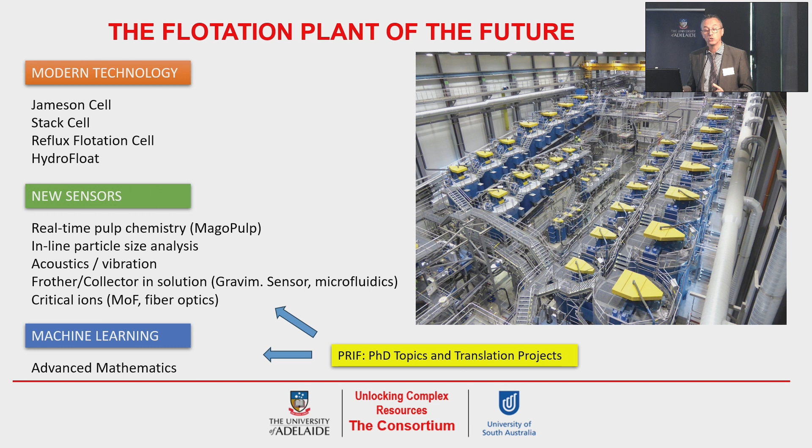A lot of things that are now just under development will be standard in the flotation plant of the future. And not to mention machine learning, which we all know will play a major role, because we would like to achieve a plant which can learn from previous operation and adjust in real time as the feed characteristics change. This would be the big advantage and a big goal.

This year I'm not going to talk about the different technologies as I did last year. I'm focused more on the application of these new flotation technologies and how I see - and we see - development and application of these technologies in the real world. I have to mention that we recently started at UNISA with my colleague Bill Skinner a specific project called the Advanced Flotation Project, which has a very applied component, and we have a number of industry partners listed there.

The key point I want to say about this project, because the discussion went on earlier this morning about involvement of PhD students with industry and their research - in this project, the PhD topics have been discussed and defined closely with the industry sponsors. Our industry sponsors are approached not at the corporate level, but at operational level. So we have individual champions within the different companies - two of them are here, Grant Small and Chris Creed from Magotteaux - but we also have other champions for each of the other sponsor companies. Sitting in front of them, we discuss what would you like to happen in the project for you, what would you like to see in your plant, on your ore?

Can we discuss a PhD topic which is of interest to you?

The PhD students we have in the project are working on a specific project for a specific company on their ore, and they're supervised jointly by relevant people in the company. This is the way we think may provide a good outcome for both the university and the industry partners. This project started this year and will last three more years, so we've basically just started.

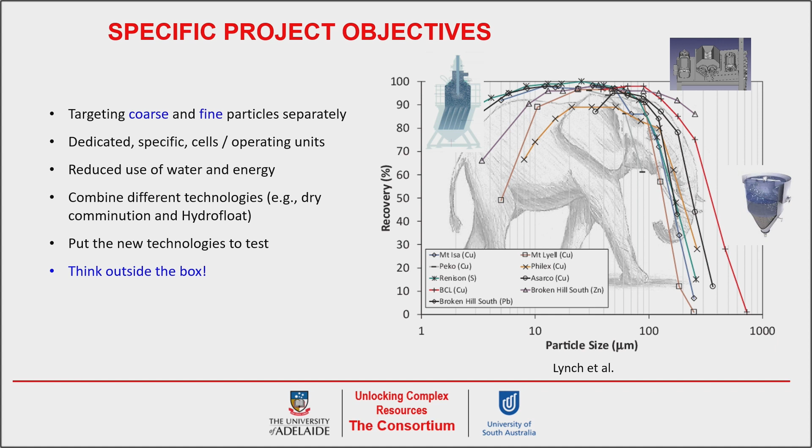But don't misunderstand me, because in the last, let's say, 10 years there have been many new flotation devices developed and offered to the market, so there's a lot of new machines around. I have to say I'm a big fan of mechanical flotation cells, because they're reliable, easy to operate, relatively inexpensive, and arranged in banks. So if anything goes wrong in one cell, you can still hope the following cell will recover that material. In principle, they're a robust technology.

But if we really want a step forward in specific applications—not everywhere, but where we want to target very coarse particles to save energy for grinding, or we have an issue with fine particles because of slow flotation rate—then we need to look at modern and different technologies. This is what we would like to test in the project on specific company ores.

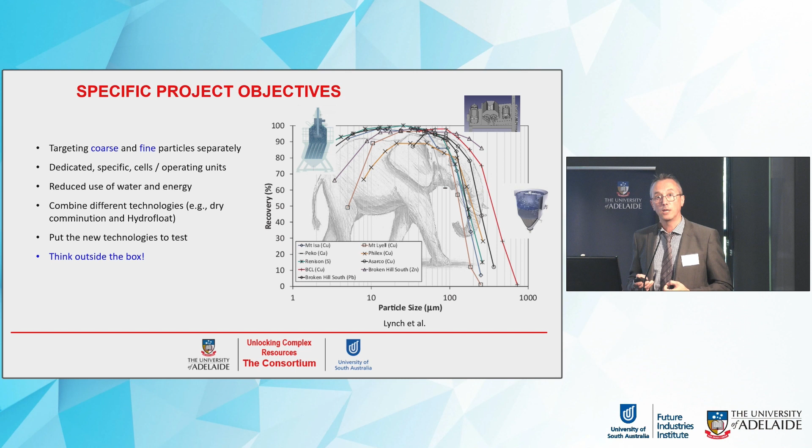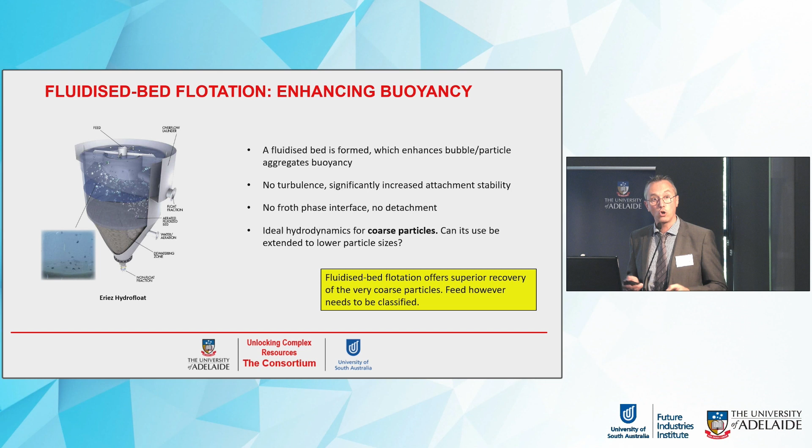I'm not going to explain the technology in detail, since that's not the aim of my presentation today, but fluidized bed flotation is specifically designed for coarse composite particles, because they can easily get to the concentrate without detaching from bubbles. We want to see how, in practice, this can apply to different ores.

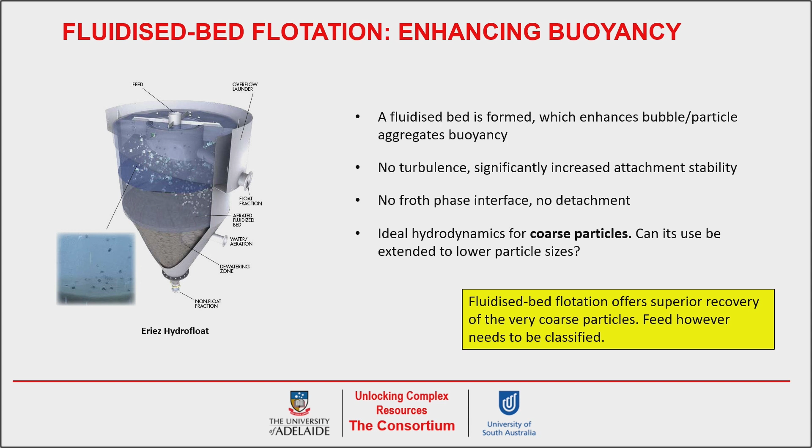Can we extend the particle size range? What's the benefit for individual sponsor companies? The same thing applies to the reflux flotation cell for fine particle flotation.

But what I wanted to talk about today, since I only have 15 minutes and probably Ruth will soon tell me to stop, is the application. Because it's been said before that environmental sustainability is now a well-accepted concept that everyone will have to follow, especially in mining.

Actually there is a specific industry body, the International Council on Mining and Metals, which has been established to look into sustainability in mining and develop guidelines and principles. One of these principles that captured my attention is to develop innovative approaches and technologies to minimize and ultimately eliminate the production of tailings, of waste.

So internal reuse, recycling, more efficient processing so that you can reduce the amount of tailings material to the very minimum. But the only way to achieve a zero waste policy is to improve your technology, to have more efficient flotation technology. So we need to work towards more efficient technologies to get to a zero waste situation.

Within this scenario, one big area which will be of interest for many years now is the opportunity to recover value from old tailings, which have been disposed of there for a long time, because back then they were considered waste material. Most of the time you have to treat that material anyway for environmental reclamation or other reasons. So there's an opportunity to recover value from old tailings, which is something I'm very interested in.

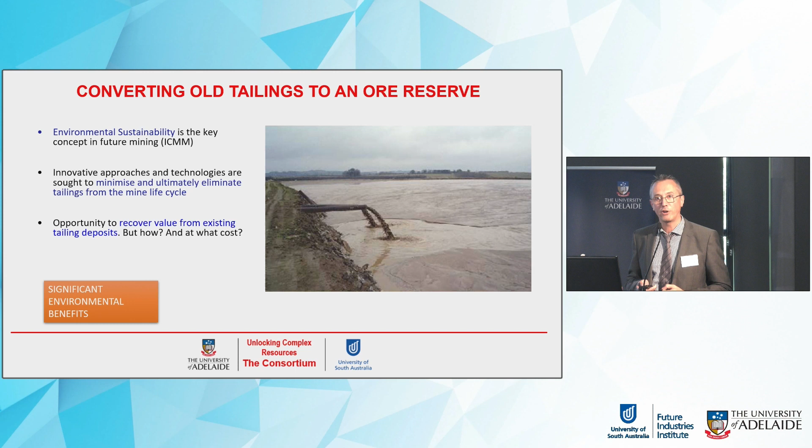As Ruth said, I like all things in operation—I like to recover value from scrap.

So if you think about it, there are advantages and challenges, disadvantages in processing tailings. Some advantages is that tailings material, most of the time, are easily accessible. So you don't have to mine them from underground. They're just there in a tailing dam. You just shovel them out or something like that. So the cost for mining that material is minimum compared to primary ore bodies.

Tailing material is already ground. If it is flotation tailings, it doesn't need to go through grinding again and spend a lot of energy for comminution. And of course, there is also an environmental benefit in reclamation of tailings. So you can imagine it's not just an enterprise to generate profit, but there is also some environmental benefit, and there can be some government assistance in doing that.

What are the challenges? And the challenge is my area, is where I'm very keen on. This material is more difficult to float compared to a primary ore. In particular because most of the time tailings have been exposed to the environment for a very long time, so the surfaces of particles can be oxidized, they can be contaminated, there can be any sort of thing that complicates flotation recovery. And also generally they are very fine because they've already been milled to that, and fine material is more of a challenge for flotation.

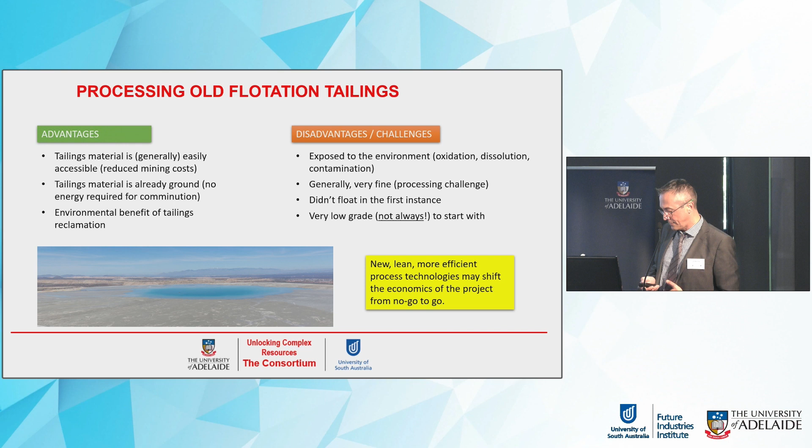And now I just give you a couple of examples of situations where a process for recovering value from tailings is actually happening, or is about to happen, or was about to happen, because it's a couple of projects I've been involved in, one of them many times along my career, so I have a bit of knowledge about those systems. One is very well known here in Australia, and it is New Century.

New Century, it's in northern Queensland. It's a zinc operation, and it is now reprocessing the zinc tailings from Century, which was the company who was running the mine when it was a primary zinc deposit. And New Century is an example of an effective way. So it is working, and it is producing a marketable and sellable concentrate, zinc concentrate.

So you can imagine in the tailings dam at now New Century, there is about 77 million tons of zinc tailings at about 3% grade of recovered zinc. So it's a good deposit, actually.

What can I say? In terms of mining, one of the strategies to reduce mining cost, of course, at New Century they use hydro mining. I don't know if you are familiar with that, but it's quite interesting to see. It's just a strong water jet which is breaking down aggregates and basically repulping the stuff, which then goes to the flotation plant. So you don't have the cost for mining, you have little cost for comminution and grinding. That's why the operation is cost effective by doing that.

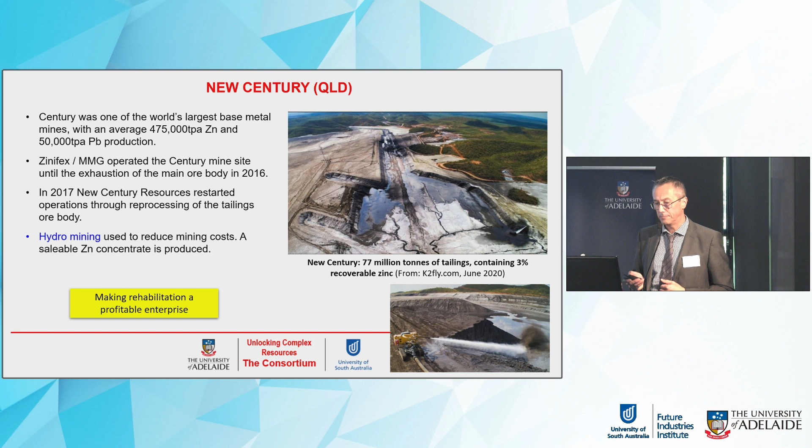And I quite have a long history with Century because we were involved in a couple of projects back with Amira, and it was a UniSA project which was called the Froth project to optimize froth stability, when it was still Century mine. And there is a unique thing about that ore which was detrimental for flotation, and it was the presence of organic carbon, what's called pyrobitumen. It was organic carbon in the sphalerite ore, and that organic carbon in the flotation feed was behaving like activated carbon. So it was adsorbing all reagents in the system.

And it was quite painful for operations because we did a mass balance of the amount of frother, surfactant, MIBC, that they were adding. They had to add about 400 grams per ton of MIBC. And out of those 400 grams per ton, just about 10% was still in solution after addition because all the rest was absorbed by the carbon minerals. So there was a huge problem of consumption of reagent. And they addressed the problem by introducing a pre-flotation stage to remove carbon as early as possible to prevent that stuff from causing further damage down the bank.

Today, the situation is improved. Carbon in the system is more under control, more or less under control, so it's not the same as in the primary ore, but still at New Century there is a focus on reducing reagent consumption and optimizing froth stability, to ensure that the plant runs stable from a water chemistry point of view.

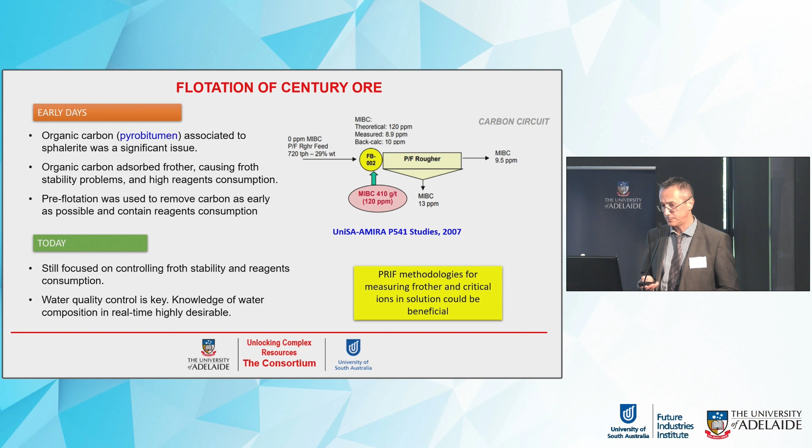And the other one is in a completely different part of the world. It is in Brazil, Três Marias, Minas Gerais. And it now belongs to Nexa Resources. It used to be Votorantim when we did some work for them.

This is a situation which is not unusual in several parts of the world. There is a huge tailings dam which contains residues from a zinc smelter, which has been operating a variety of different ores—sulfide ore, silicate, zinc ore—by different processing routes. Some acid leaching, roasting and leaching, flotation, and all those tailings have been accumulated in this big tailings dam, which, guess what, is standing just nearby a very important major waterway, a river. So you can only imagine the environmental damage if anything fails in that situation. So there is a lot of pressure for reclamation of that area for safety and environmental concerns.

So the project is, can we do that and make it viable from an economic point of view? Because that stuff contains a decent amount of zinc and silver. So can we float that material and make it viable? The company started looking into this about 10 years ago, and several different research centers and universities worked on this. We got a project at UniSA about 5 years ago as well, and tried to develop a flotation strategy for this material.

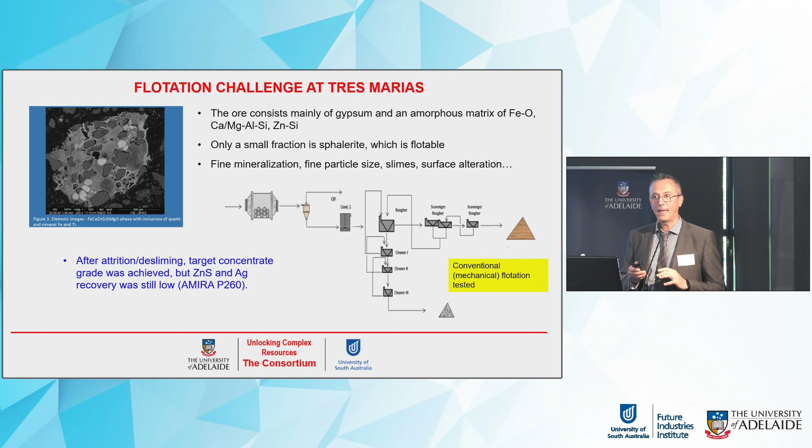I decided to include this in my presentation today because this is the perfect example of a metallurgist's nightmare. Material from that tailings dam didn't look anything like a real ore. It basically consisted of agglomerates of very fine particles of sphalerite and other minerals in a kind of amorphous matrix of gypsum and calcium, magnesium, aluminum silicate, zinc silicate stuff—something you don't know how to deal with. Because ideally the only floatable species is sphalerite, which is the zinc sulfide, and the silver sulfide, silver in the sphalerite, and those were just very finely disseminated in this amorphous matrix, which was almost impossible to recover.

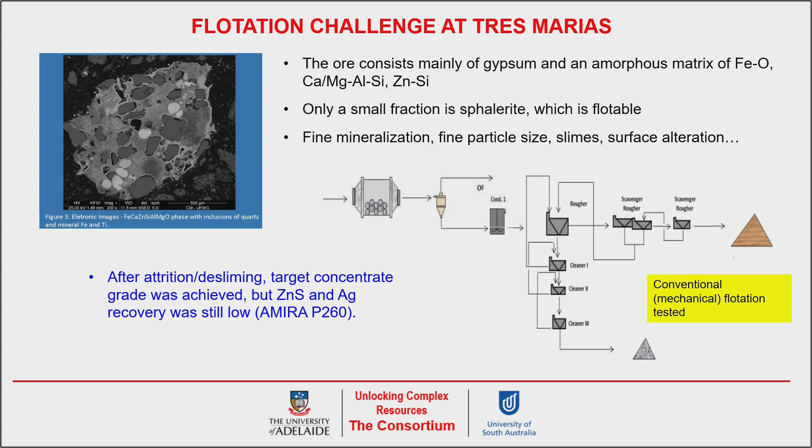So the strategy here was to start with attrition, to disperse as much as possible the particles, desliming to remove as much as possible of the fine gangue, and then flotation with a lot of optimization of the reagent scheme, because that material has been exposed to the environment for 40 to 50 years. So you can only imagine how the surfaces looked—we had to make them hydrophobic again.

Back then, it was half of a success because we managed to get target grades for the concentrate. We were able to produce a 40% zinc concentrate and 3,000 ppm of silver, so it was not bad. But still, recovery was insufficient, was not high enough, because those particles are very, very fine and have a very low flotation rate.

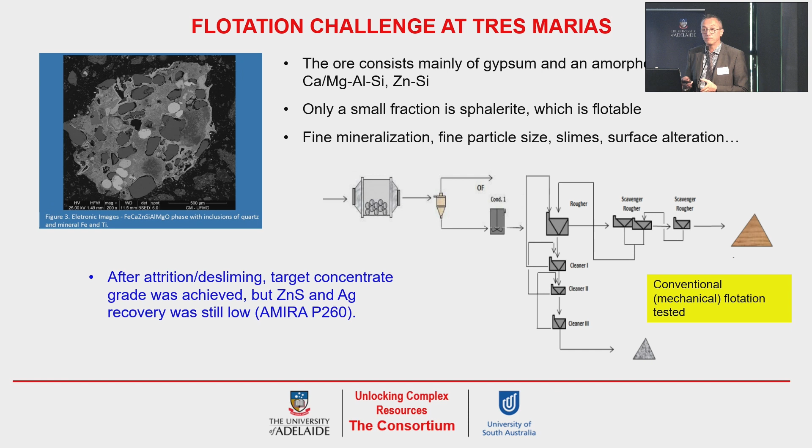And this is my observation now after many years of PRIF. Back then, we did optimization of flotation using just traditional mechanical flotation equipment. What if we use more advanced technologies? Could we do better today? This is why we think of projects like the Advanced Flotation Project, where we put technology into practice. This would be a perfect example to test the new technologies.

So what if we use the reflux flotation cell? Can we get better grade because we reject the gangue much better? Can we do Jameson cell, high energy, high shear? We can increase the flotation rate of fines. So can a project which was not viable 5 years ago become viable now because of implementation of new technology? And I guess this is the goal that all research projects should have.

I'm very pleased to have been part of PRIF, because that was the aim - let's develop something that through the translation project can go to site and provide a benefit, making some operations viable which are currently not economic. Brett Triffett mentioned this morning that in South Australia there are sub-economic deposits right now. Maybe with new technologies, sensing, and machine learning, we can shift that line and make them economic. The same applies to recovering tailings from operations - we can become more efficient and make it economic as well as providing an environmental benefit. So the key point is that the ultimate goal is to turn non-viable projects into viable projects.

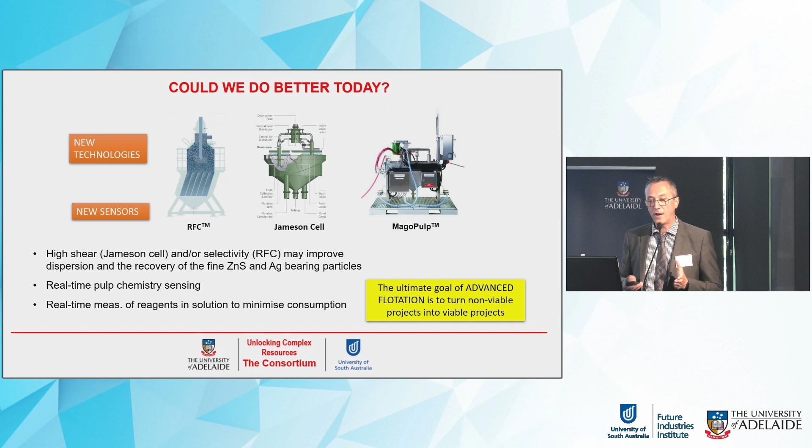I'll close my talk with this slide, just to remind everyone. Some people say, why bother about tailings? Well, sometimes thinking about tailings when it's too late is much more expensive than thinking about tailings when you're still in time to do something. This is just one of many examples of things that can happen when tailings facilities go wrong. So why not look into those for the environment and try to get some value at the same time, which is my interest and my passion right now. Thank you.

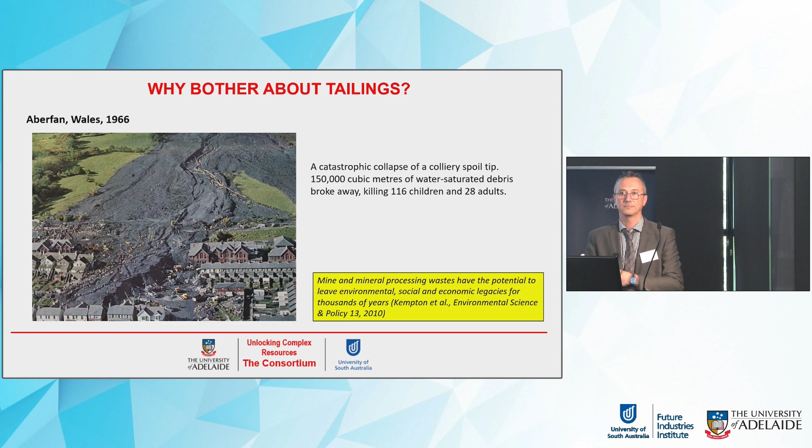Thank you, Max. This is very much a layperson's question. I'm just wondering, when you do additional metal extraction from tailings, you still obviously have a waste stream at the end of that. Is there any beneficiation that occurs to that waste stream, taking more metal out of it, and those fine particles, that silt material that's left over - has that got any applications in any industries anywhere?

Well, yes, I can tell you something from the little experience in the area I have. Of course, the whole idea is to try to recover value as much as possible, but then at the same time, maybe find a better use for that material. So there are secondary products you can use rather than stocking that stuff in a tailings dam. If you can reduce the content of metals below a threshold, you can reuse it as backfilling material or for brick construction if suitable. So the idea of reprocessing, from my point of view, is metallurgy - get value. But I know there are a lot of possible applications for these materials rather than disposing of them again. It should be a comprehensive operation which involves both recovering value and trying to find a better destination for that material rather than disposing of it again.

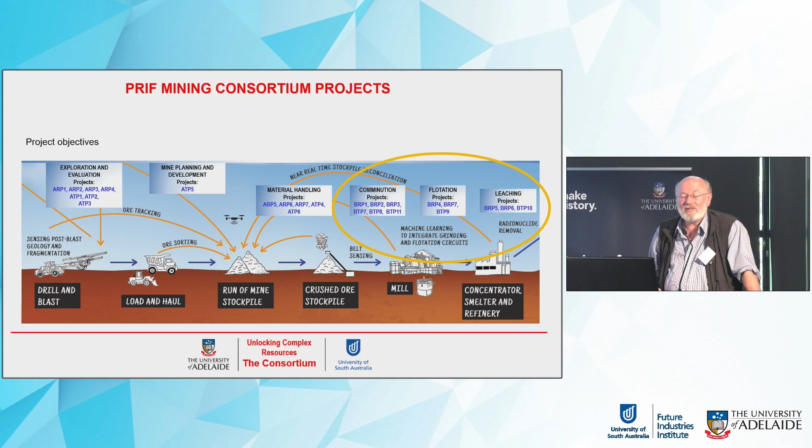Okay, so I'm going to talk a little bit about Program B and introduce what we've been doing. So this thing - okay, technology, isn't it wonderful? Peter showed this diagram, and this is to show you the circled region where Program B sits.

It overlaps with Program A in that the kind of material entering the mills is very important in determining the products of those mills in terms of particle size, but also chemistry. And the projects in Program B cover things around the mill, including particle sizing and cyclones.

Looking at flotation in terms of sensors, and also modelling the performance from bringing chemistry into the parameters that you measure at plant. Richmond later on will be talking a lot about that, the work of Bismark, etc.

And then at the leaching end, projects that revolve around sensing of reagents and/or ions in solution, as Max was mentioning earlier. Very, very important. And most plants in our history, particularly the history of me and Max going way back...

You go to a site and they say, well, yeah, we measure chemistry, we've had pH probes all over the place, and you go and have a look and they're all broken, but they were wonderful pH meters, pH probes, because they registered pH 9.5, exactly, all of them. So we're all fine, you know. Process is so fantastic.

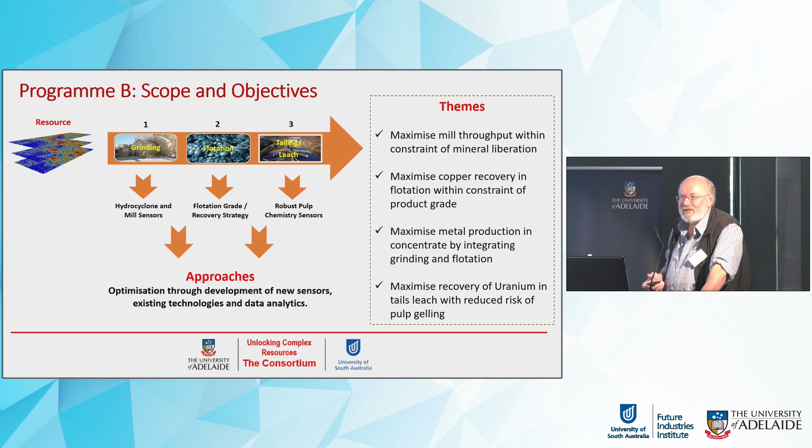So integrating the grinding sensors and data with the flotation data gives you another lever to be able to pull and highlight variability, but also optimise. And lastly, look at ions in solution throughout the plant, not just in leaching, that are critical for that process, or process efficiency.

So Program B has its list of translation projects and linked research projects. We'll go into a couple of those in the next slides. And the key industry partners in terms of technology partners are Magotteaux and Manta Controls in this regard.

So, the research projects. We've got the sensing and optimisation of AG and SAG grinding mills. This is all around vibration measurement of mills. And in that, Kwaku Boateng Owusu, he has now graduated, and he has a CSIRO Early Research Career Fellowship, and he's gone back to his love of pyrometallurgy and steel making. So he's in Melbourne now.

So he's finished up, and in that he worked with Magotteaux and built a laboratory scale SAG mill for doing vibration measurements in the lab, and to look at the changes in vibration that you achieved when you changed feed ore types, mainly around hardness and proportions of hardness of different minerals in the system, and was able to show you could, in the frequency domain, detect changes in hardness.

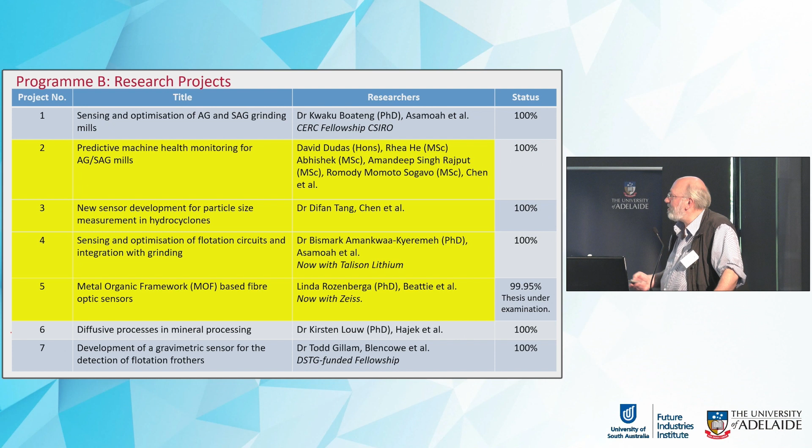In the translation projects, we had the Manta mic acoustic devices set on the ag mill, and that was again with Kwaku and Richmond, and that was completed.

We only got short distance using these ultrasonic PSD particle size distribution sensors for the grinding circuit, only because when we got to that stage, this was going to require a large-scale investment from BHP at Olympic Dam in order to get that equipment into site. It's still ongoing discussion, but it all has to be around the business case and the value proposition for that equipment to be in place.

Pulp chemistry monitor, I've mentioned this, which is with Bismark and Richmond, and that's being selected for extending within the PRIF extension over the next year and a bit to try and push that further along the commercialisation pathway.

Linda's work with the MOF sensor is being taken over now by Piotr Pawliszak. Piotr, hand up over there, with a beard that's really magnificent, much better than mine. Wait till you get grey in it, mate.

So that work is going to continue, but they're targeting other funding sources for that in collaboration with Magotteaux, whether it be a CRCP or a seed grant or something like that, because that requires a couple more years of work, since there's about 3 different bits of technology that have to be developed together.

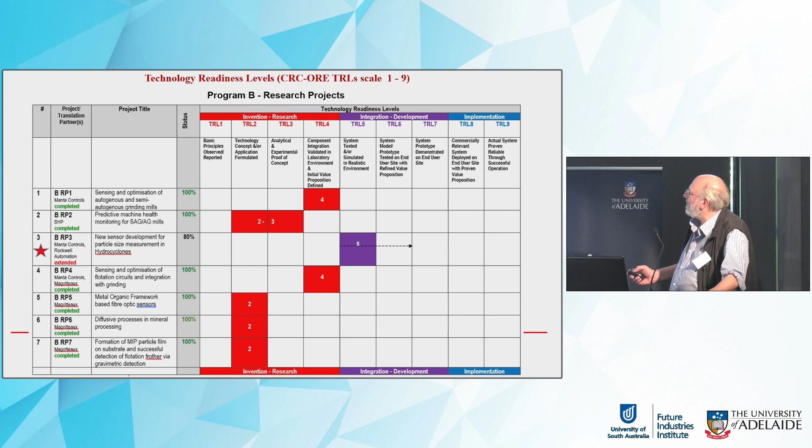The TRLs, won't bore you with these, but just to indicate that the things with a star and an arrow are the things going forward in the extension to the PRIF over the next year and a bit.

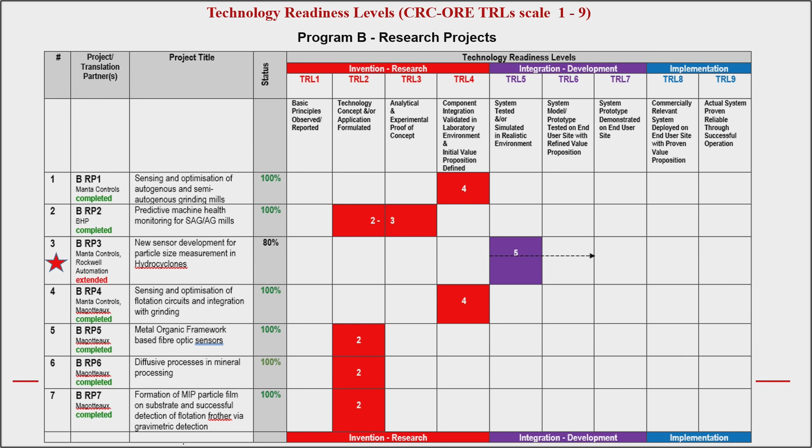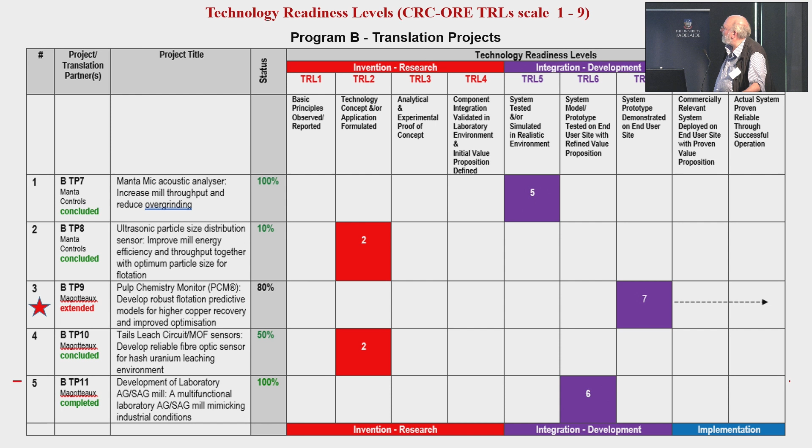So we've got the measurement of particle size in hydrocyclones, the pulp chemistry monitor-based things, and the modelling of flotation performance using both plant and new additional data from chemistry.

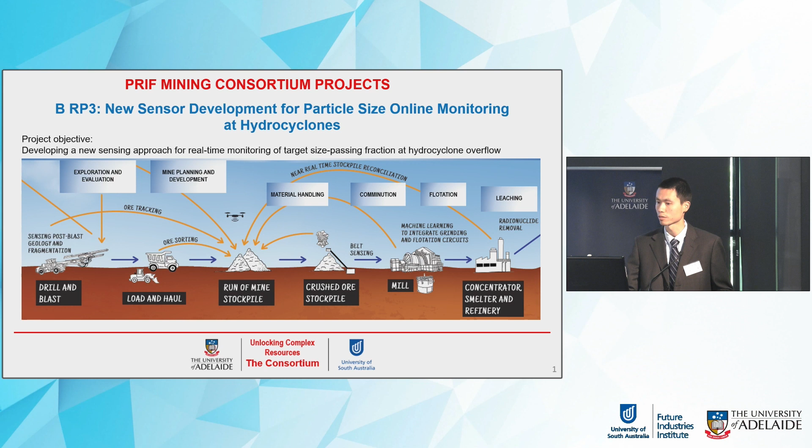This is because almost 50% of the total costs in the mining industry come from energy-related matters, and comminution is a giant in energy consumption. I think most of you may agree that it's very difficult to reduce energy consumption for a particular given mineral processing plant. Then what else can we do?

We can do automation. Traditionally, particle size analysis is done offline, which can lead to hours of delay and result in large variability in the products. Now our sensor comes in here. It monitors particle size online in real time and feeds the information back to an automatic controller that will adjust the operation parameters accordingly. That helps reduce the variability, increase the throughput, and improve the flotation efficiency, most importantly, at the same energy consumption level.

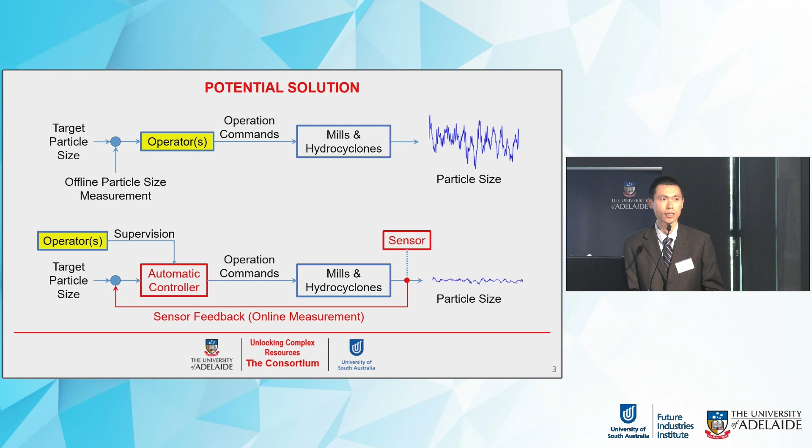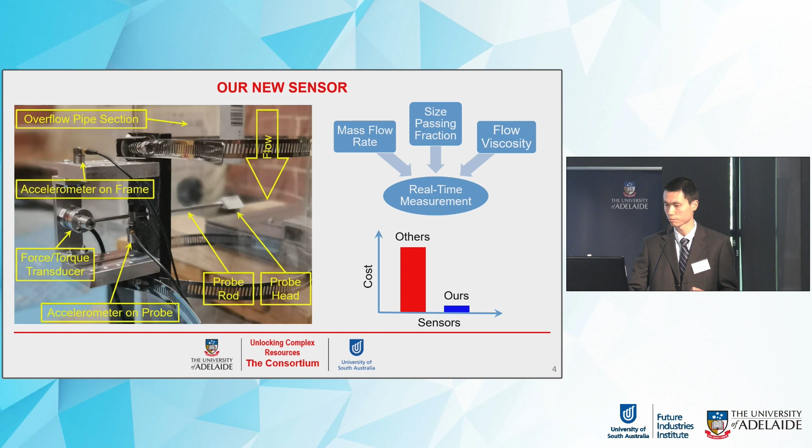Here is an example of the benefits. Let's be conservative and assume just a 1% throughput increase, and we would be expecting an additional revenue of around $13 million. If every hydrocyclone unit is monitored by the sensor, then we can largely prevent bad operations that result in hydrocyclone faults. Assuming 1% of recovery loss can be prevented, we would be expecting an additional revenue of around $3.5 million.

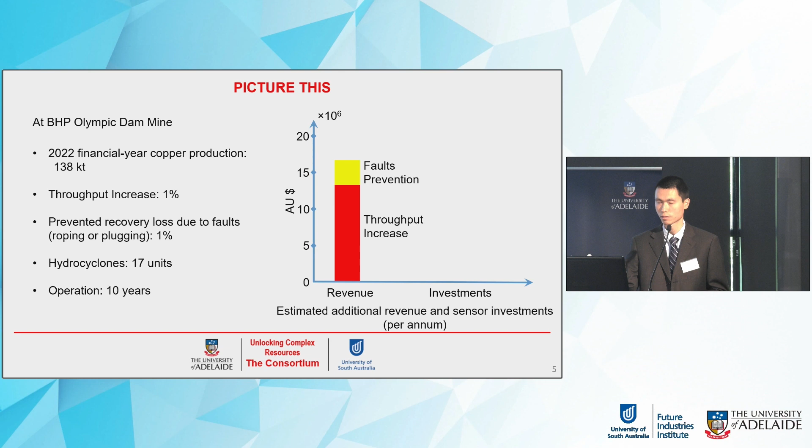And how about the cost of the sensor? You'll be looking at just a tiny bit, and the benefit is obvious.

To lower the cost of the sensor, we have developed a unique way based on force measurement. The probe is subject to vibration under particles impact and also flow-induced drag, depending on the vibration frequency range. We apply two different mathematical models to extract useful information from the signals, including the mass flow rate and the flow viscosity. That's why this is a multifunctional sensing system. With all the available information fused together, we are able to obtain the particle size distribution.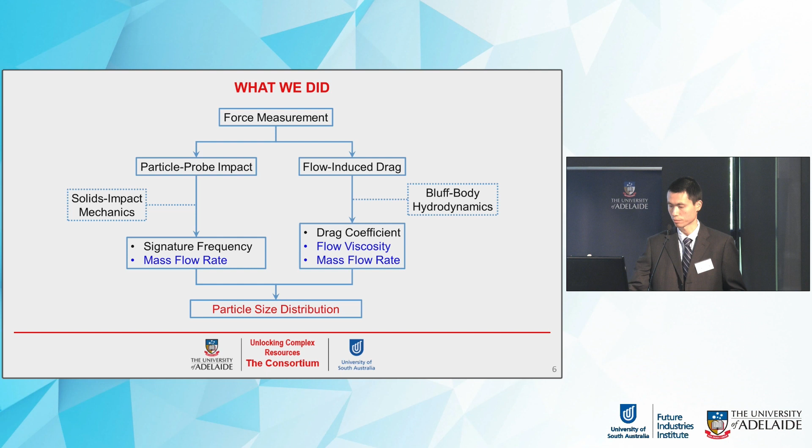To understand the probe response under particle impact, we started with testing in dry conditions, and that is shown to be useful in applications beyond hydrocyclones. I will cover that in more detail shortly.

After the dry test, we move on to more complicated scenarios involving slurry in a small-scale closed-loop flow system. And to test the scalability of the sensing system, we have also done some tests on a larger scale closed-loop flow system.

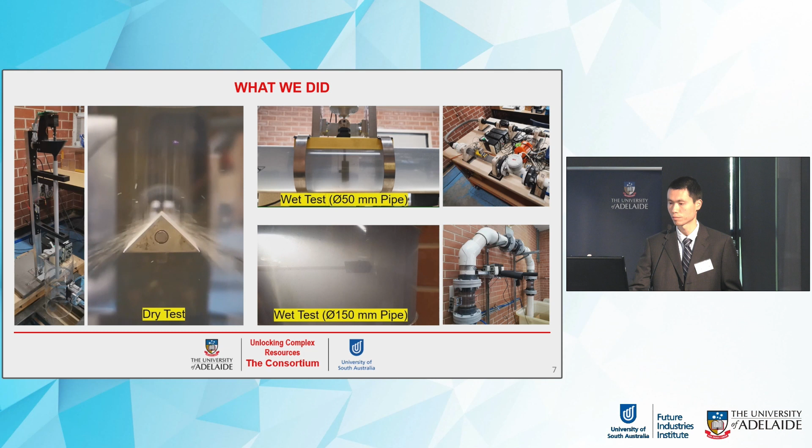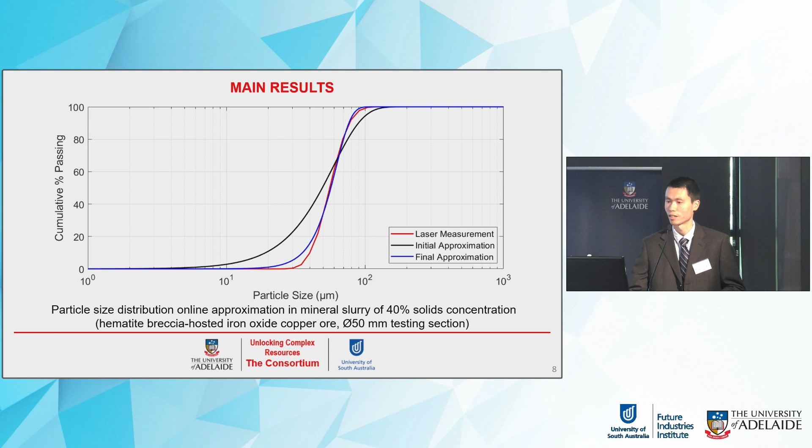Apart from the particle size distribution approximation, the sensor can also be used to detect hydrocyclone roping. Lin Yang from ARC Training Center will give you more details about this. But before that, let's have a look at something different.

In dry conditions beyond hydrocyclone, Nimble Resources has their unique dry production for alluvial gold mining using their rotary air concentrator. They are looking for something that could monitor the density of particles in the concentrates. So why density but not size?

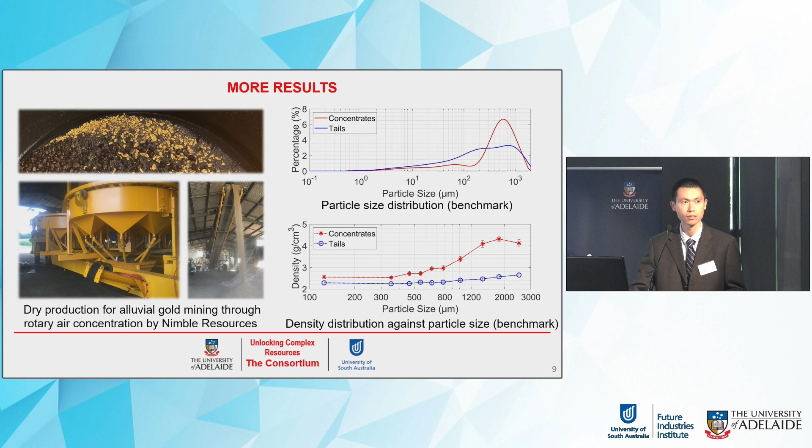This is because the concentrates and tails have large portions of particles within the same particle size range, so looking at the particle size does not help. Instead, if we look at the density distribution against particle size, then the concentrates and tails are very different. So now the question is, can our sensor monitor density?

You might be wondering, could particle size distribution also be available in other dry tests, in other dry applications? The answer is yes, and Lin will give you more details about that.

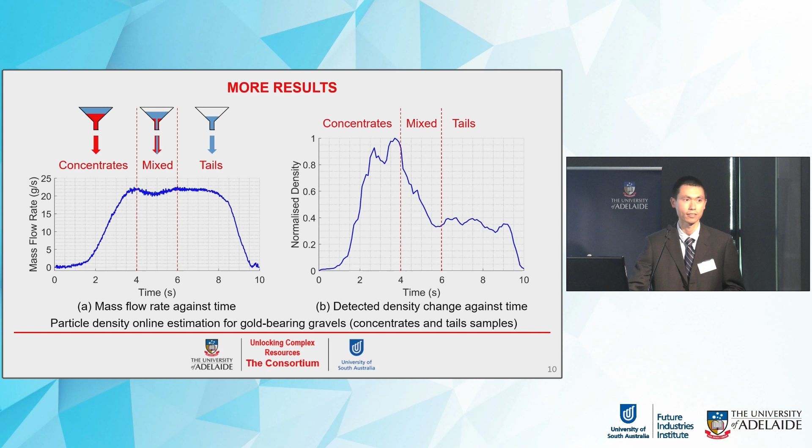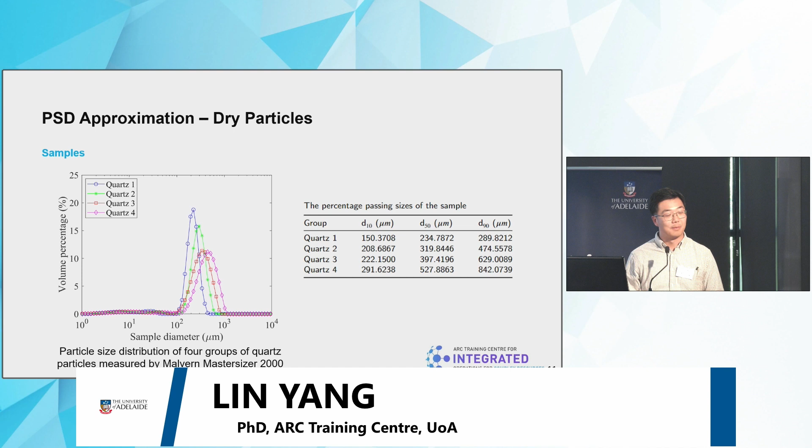Hi everyone, I'm Lin Yang from ARC Training Center. Thanks to Difan for the detailed introduction. As Difan mentioned before, our sensing system can measure the particle size distribution and the mass flow rate of a dry high intensity particle laden flow.

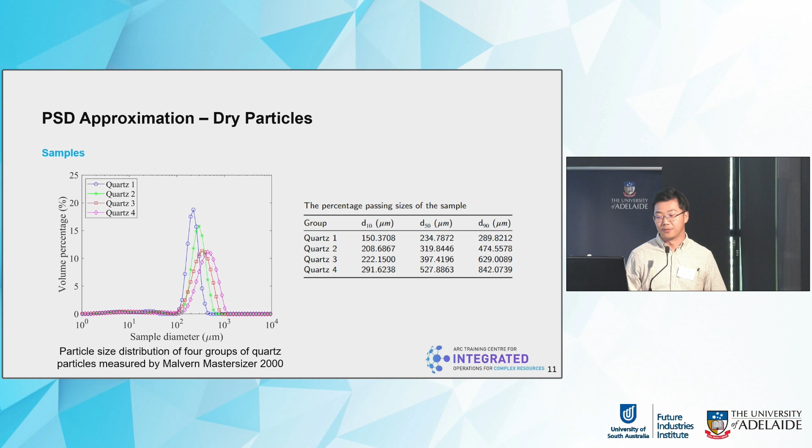So here are the test samples that we have for the dry test, which is 4 groups of quartz particles with different but also similar size range and particle size distribution. The left-hand side figure shows the particle size distribution, measured by a Malvern Mastersizer 2000, which is an offline laser-based method. We use this result as the benchmark of our test. The percentage passing size is also shown on the right-hand side figure.

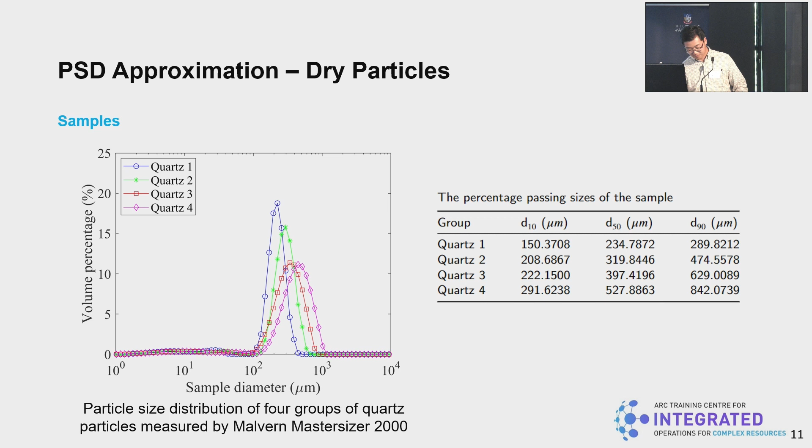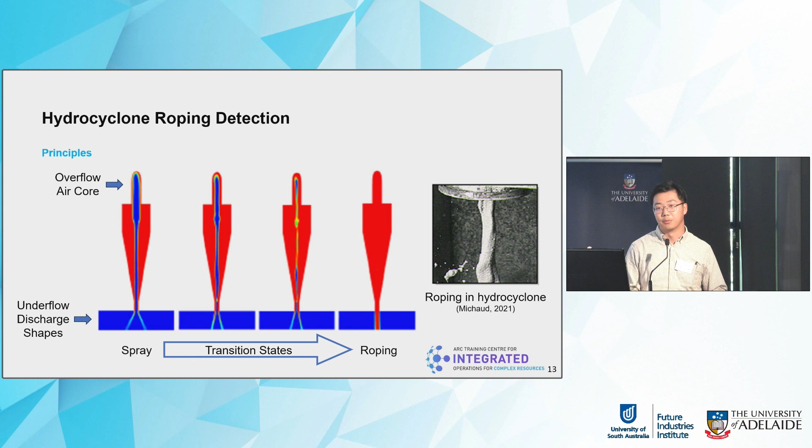On the left-hand side, it shows the transition from spray to roping of a hydrocyclone working status. One difference is that if we look at the underflow discharge angle, when the roping happens, the angle decreases. The other difference is that the overflow air core will disappear when the roping happens. Based on this, we developed our method to detect the roping by using our force transducer.

By mounting the force transducer at the overflow of the hydrocyclone, during spray working conditions, which is normal, the overflow will have three-phase flow: gas, liquid, solid. But when roping happens, the air volume starts to decrease, and the three-phase flow becomes two-phase flow, which is only liquid and solid. This causes a change in the effective viscosity and a resulting change in the drag force.

By combining the change of the drag force and the particle size distribution, we can detect the roping.

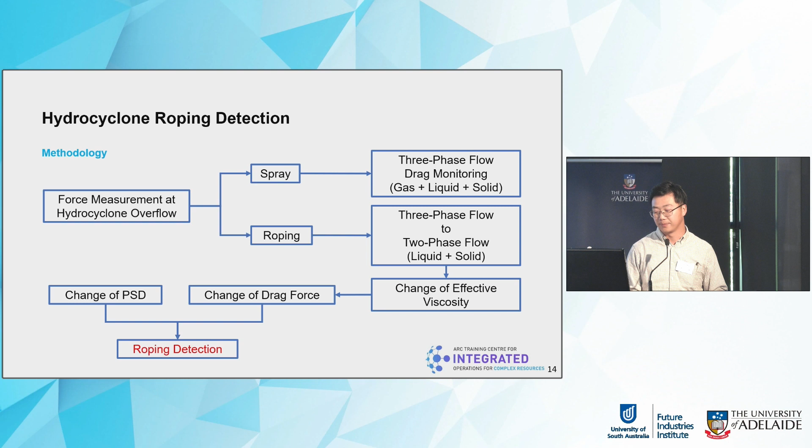Here are the results using a sample from a mine site. Thanks to Max for providing the samples.

It's exciting that with the current development of our sensor and all of these functions, our sensor can be used in more and more industries. I will let Difan conclude.

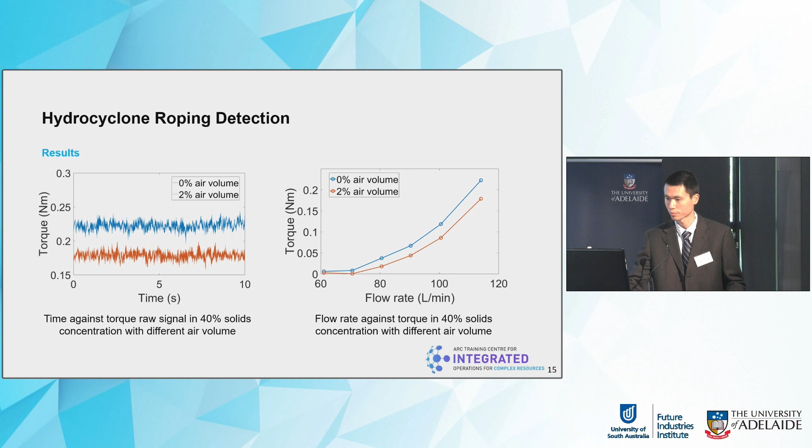Thank you, Lin. Beyond application in hydrocyclones and beyond mining applications, our sensing system can also be used in fields like power plants and powder manufacturing, as long as it deals with particle size monitoring, whether dry or wet.

We are looking to install our sensor at hydrocyclones at one of the listed mine sites. We are also planning to try the sensing system on the vertical roller mill at BV, and also try that on the rotary air concentrator at Nimble Resources.

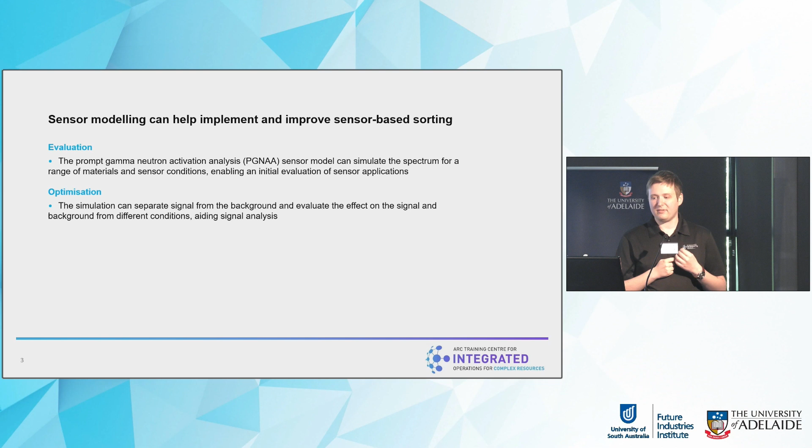The key points I want to get across today are that sensor simulation can help implement and improve sensor-based sorting. It can help evaluate applications of sensor-based sorting, as simulations can model the response for a wide range of materials and sensor conditions, enabling an initial evaluation for given applications. It can also help optimize by separating signal from background and interrogating the effect on both under different conditions, helping analysis.

So why do we want ore sorting? The main issue is that global mineral demand is projected to rise dramatically due to the energy transition and a growing population.

Meeting this demand with traditional methods requires great cost, great resource consumption, and produces large amounts of fine tailings. So we need to find better ways to do this. One such way is the use of sensor-based sorting. By removing waste material before extensive processing, it reduces the cost, reduces the resource consumption, and reduces the production of fine tailings waste. A key sensing technique is the use of prompt gamma neutron activation analysis, or PGNAA.

These sensors can provide the multi-elemental composition of the processed material for large quantities of bulk material, making it ideal for bulk sorting for high output mines. My research is looking at developing a sensor model to help improve and extend the application of PGNAA sorting.

Today I want to present the use of this model to investigate a range of characteristics, including the sampling distribution, the effective material thickness, and moderation, as well as investigating ways to help improve analysis, such as by building elemental libraries and isolating the signal.

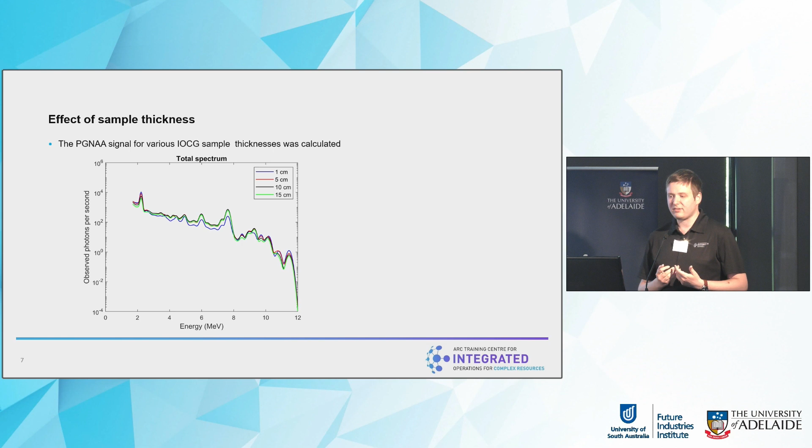We can also use the simulation to investigate the effect of sample thickness, as while the same elemental balance is present, the level of thickness can affect the response. Here we can see the energy spectrum of the recorded photons, with characteristic peaks corresponding to both the sample and the components of the sensor.

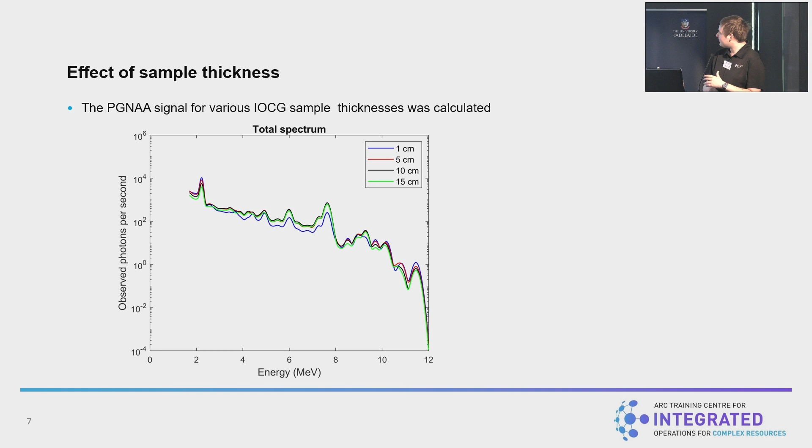We can see that for different sample thicknesses for the iron ore copper gold material, there are complex differences in the spectrum. The simulation can be used to help interrogate this and understand what is going on, as it's possible to separate just the signal from the background noise.

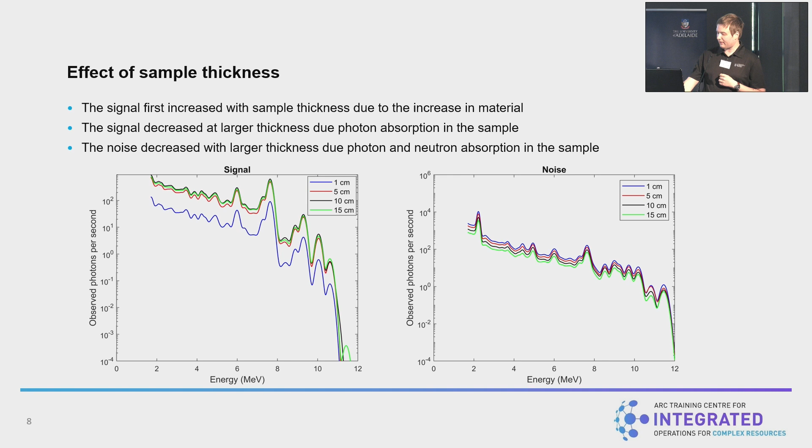However, if we look at the noise, we can see that there is a clear and consistent reduction of noise with increasing thickness, due to both neutrons and photons being absorbed within the sample, reducing that noise and helping boost the signal-to-noise ratio.

We mentioned the impact of neutron moderation, which is beneficial for measuring larger samples. However, if you want to measure a small amount of material, it's possible to use moderating material to reduce the neutron energies and get a boost in the sample activation.

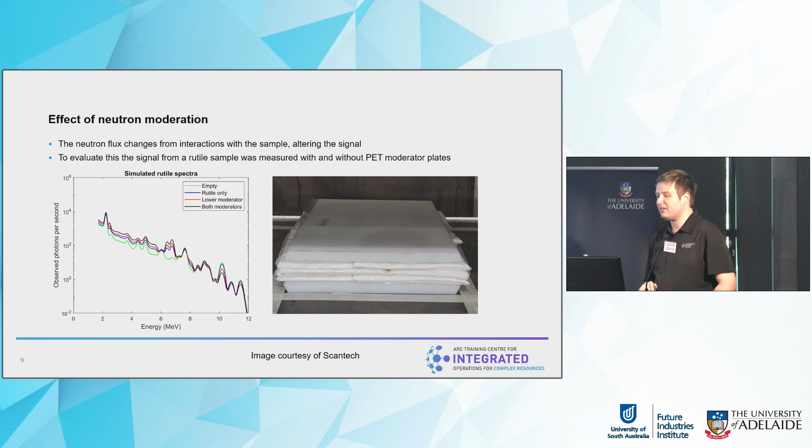To test this, a consistent 15 kilogram titanium oxide, or rutile, sample was measured, both alone, with a moderating polyethylene plate below, and sandwiched between two moderator plates, as shown on the right. The resulting signal is shown on the left, and we can see that the main titanium peaks located between 6 and 7 MeV are significantly increased with the addition of the moderation, showing that even if the same amount of material is present, good design can help boost the measured response.

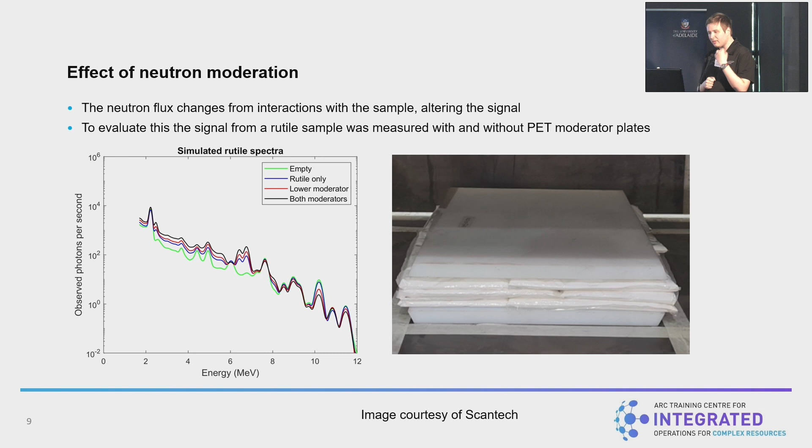This can be further illustrated by separating the signal from the background. As we can see on the signal on the left, there is a consistent increase across the entire spectrum, as the additional moderation boosts low-energy neutron flux reaching the sample and boosts the measured signal by increasing activation.

There is another benefit that the absorption of neutrons within the moderator reduces the background, as shown on the right, where there's a consistent reduction, apart from the hydrogen peak at around 2 MeV and the carbon peak near 5 MeV, due to the presence of these elements within the moderating materials.

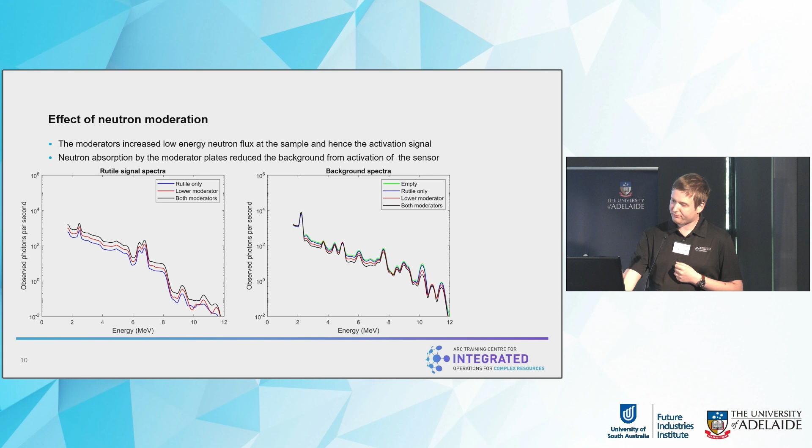So, as well as being able to test a wide range of characteristics, the simulation can also be used to help build elemental library spectra to help the analysis.

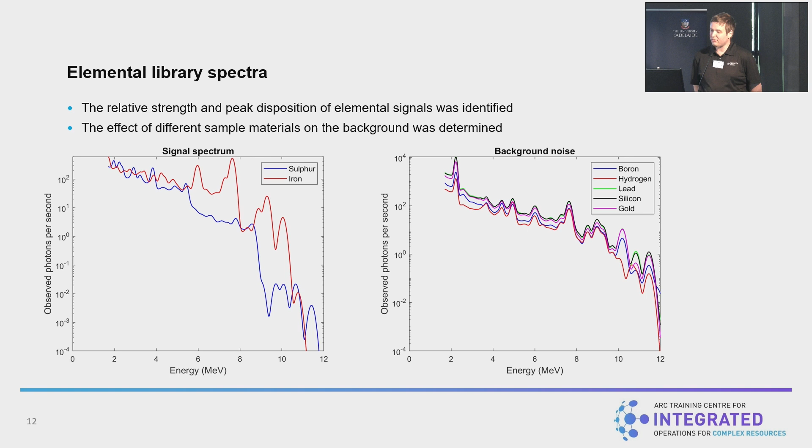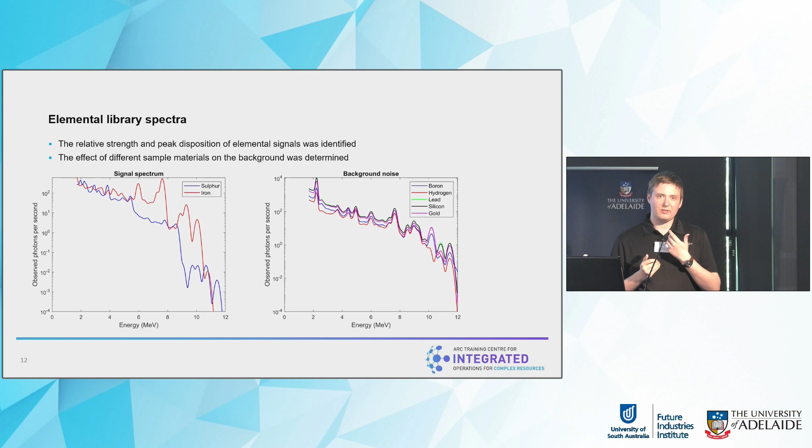As well as the total number of photons, we can extract the relative energy spectra. On the left, we compare the signal from 30 kilograms of sulfur and 30 kilograms of iron. There are differences both in the total strength of the spectrum, as well as the position and strength of the energy peaks, which is used to determine the relative composition of the material. Looking at the background, there are complex effects of the material, as the varying neutron and photon absorptions of the sample can have complex behavior on the background.

So why do we want these elemental library spectra? It's because they can help us evaluate the compound material. Here we've scaled by the relative weight composition the elemental library spectra for the iron ore copper gold ore, and compared it to the previous compound material thickness measurements. For the 5 centimeter case on the left, there is a good match in the overall spectrum, meaning there is a good prediction.

However, we can begin to see some variation between the library prediction and the compound material measurement for 15 centimeters. This is due to the fact that relatively small samples are used, so for a thicker test case, there's differing levels of neutron absorption, which begins to result in differences between the elemental library spectra and the actual measured spectrum. Accounting for this could help improve the analysis.

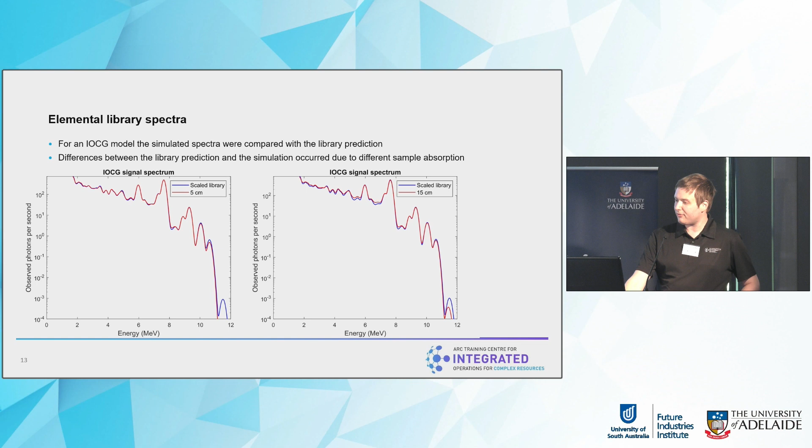So I've talked a bit about how it can both be used to investigate characteristics and analysis. What are the next steps? I want to continually upgrade the simulation to improve the accuracy and better match the GEOSCAN sensor. I'm also going to continue investigating signal analysis by helping to investigate the sample's effect on the activation spectra and investigate extracting the signal from experimental spectra.

I'm also very interested in using the simulation to test a particular case study for a real ore and belt sample, to see if the simulation can be used to predict the response of the sensor for a real mine. I'd like to thank the partners of the Training Centre and thank you very much.

Any questions for Dylan? Kathy? Thanks, Dylan. Just a question.

I'm not familiar enough with what was happening in Stream A. Did Scantech run their sensor up at Prominent Hill on the belts? Can somebody pick on that? Do you know? I'm not sure if it's so. We've got a couple of people from Scantech here who might have some knowledge of that. No? Did you actually run a belt sensor up at Prominent Hill or Carrapateena as part of this project? We're all one big happy family now.

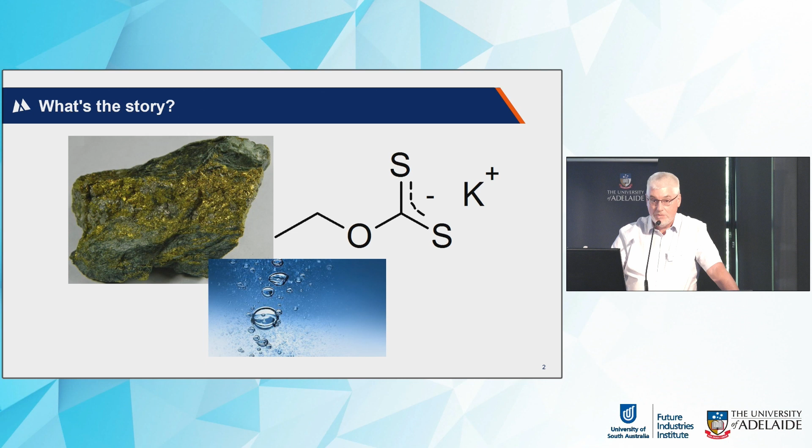Think of a glass of beer. You've all seen a glass of beer? Put your hands up if you haven't. Good, everybody's seen a glass of beer. A glass of beer actually demonstrates flotation quite nicely.

The beer is the pulp. On the side of the glass you get bubbles coalescing and floating to the surface. If you assume there were particles in that beer, you wouldn't be drinking it, but those particles should be either hydrophobic or hydrophilic. The hydrophobic particles stick to the bubble, rise to the top, you have froth, you recover the froth. So if Mum doesn't understand what flotation is, just show her that and explain it and she should get it.

Simple. Well, it's not so simple. I live by two inescapable truths in my life. One is you need to grind to liberate the minerals from one another. If you don't liberate them, you're not going to make grade and you may not make recovery. Once you've got liberation, it's very important that you think about the surface chemistry of the things you're trying to separate. If you haven't got the right surface chemistry, you are not going to get a separation. So, liberation, hydrophobicity, they're the two words I'd hope that when you leave this room, they're imprinted on your brain.

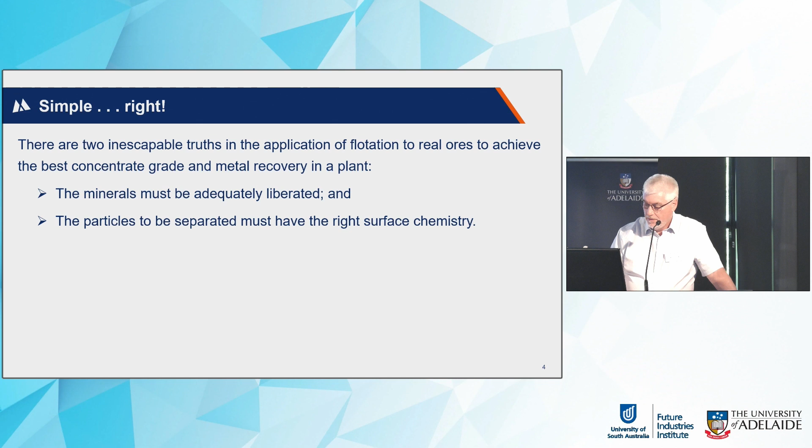There are a number of reasons why it happens like this. One is that maybe you haven't got liberation on that particular day. The reagents might not be right. The chemistry may not be right. Invariably, when we're running a plant, the things we actually measure and monitor and try to control... we try to control the feed grade, but really we're at the mercy of the mining engineer as to what goes into the plant.

Miners are usually paid based on tonnes drilled and blasted, or metres drilled and blasted, or tonnes up the shaft or out of the pit. When miners don't get ore, they ship waste because their bonuses are based on tonnes. There's no mention in most contracts for mines about quality. It's all about tonnes. This happened at Mount Isa when I worked up there. If they didn't actually mine real ore, they mined waste up the shaft, through the crusher, and in lead zinc we actually had a heavy media plant, so that would take care of their stuff-ups.

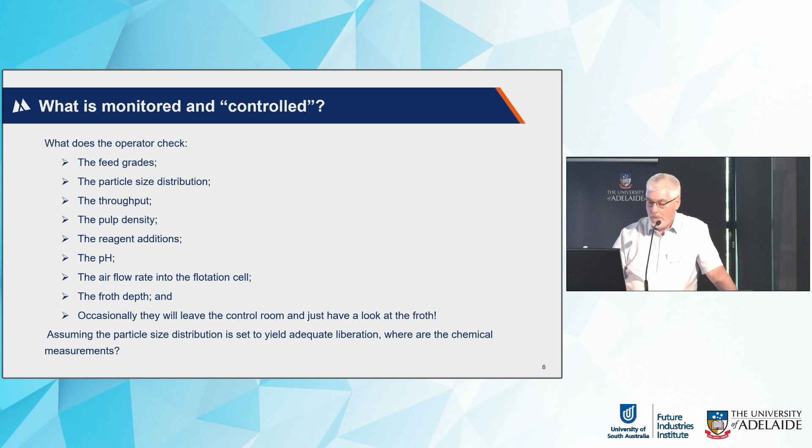Now, I'm not talking about grinding 100 million tonnes of ore to a P80 of 38 microns, because primary grinding is about liberating the non-sulphide gangue from the sulphides. Regrinding is about liberating the valuable sulphide from the gangue sulphides. So if you could measure liberation, particularly around regrind, you could monitor what you should grind to, reduce your energy consumption and be more specific about what you're trying to do in regrinding.

A lot of PSI or particle size monitors measure a single point - it's either a P80 or a P50 or a P something. We very rarely look at the size distribution. If you could measure a distribution, that might tell us something useful, and we could use that to try and operate the plant better.

If we could measure the hydrophobicity, it would give us an idea of whether we've conditioned the particles we want to separate correctly so that they will attach to a bubble.

Obviously, pulp chemistry - Bill's talked about the Magotteaux mill. Measuring pulp chemistry is the first step in getting to some of those hydrophobicity numbers and trying to improve the flotation process. If we could measure residual reagents in the pulp, collector, frother, perhaps we can adjust those reagents so we can reduce the amount we're adding and be more efficient.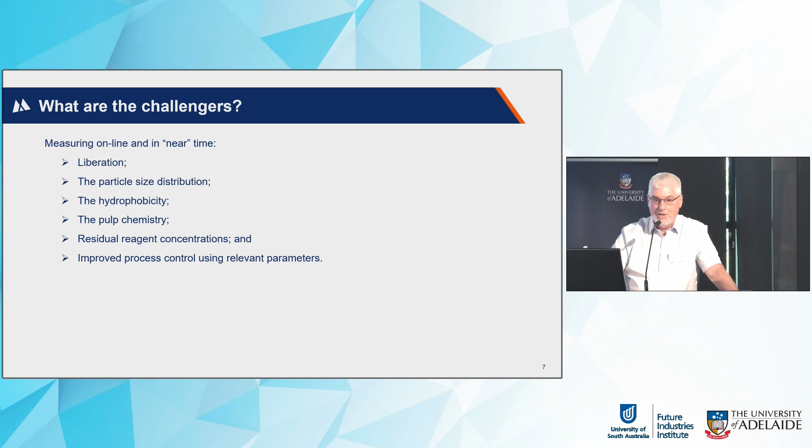Okay, I think I've waffled on enough. Questions, if you dare.

Any questions, Chris? I've stunned them.

Everett's behind you. You have a whole list of things - were they listed in your order of importance? Or I should ask, if you only had one thing off that list, which one would it be?

Well, I've got one already - I'm measuring the pulp chemistry live. That's a very good start. The pulp chemistry is actually a proxy for the changes in mineralogy.

With the trial we've done up at Prominent Hill, it did show that by using the chemistry, we were able to control the collector, the air and the level simultaneously to get a better grade recovery position. We're trying to do an extended trial up there now. We've changed the way we think it should be operated, because in that Jameson cell, its key objective is to make a concentrate grade. So our algorithms now - you type in the grade, and for the change in chemistry, it will optimise the collector, air and level on the Jameson cell to get that grade at the best recovery.

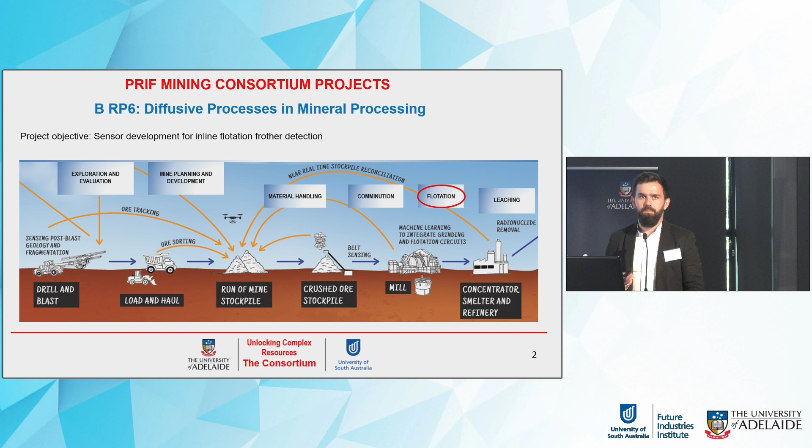Okay, so my name is Piotr, and today I would like to talk about the microfluidic sensor for flotation frothers. And how do I use that? Okay, sorry about that. So, I'm going to talk about frothers. Obviously my project was related to the flotation process, and the main goal of my project was to develop a sensor that will allow for real-time measurement of the frother concentration.

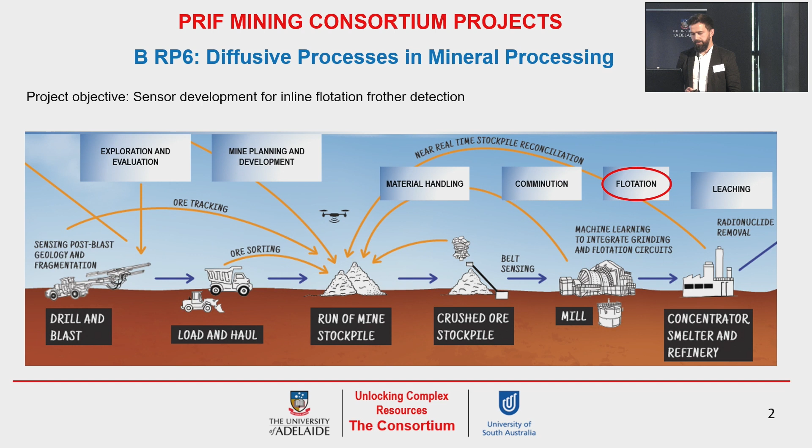The key achievement of our research was that we were able to design, fabricate, and develop this microfluidic device for inline measurement of frother concentration based on the bubble generation frequency. The key advantages of this sensor are that it's quite cheap and simple because we just need a high-speed camera to count bubbles. It's very sensitive, as even a small amount of frother will significantly affect the bubbles inside the microfluidic channels. And it can be used for various surfactants having completely different adsorption properties.

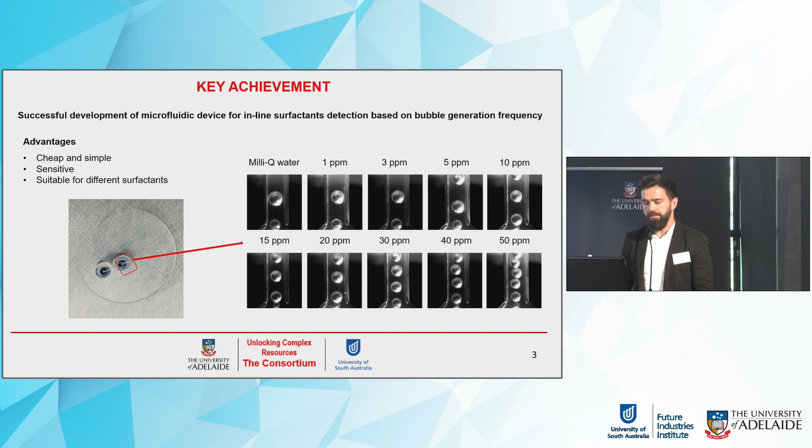And why is this important? Because currently there are no methods available for inline measurement of flotation frothers. To describe this problem, flotation frothers are surfactants, the same as washing powder. I think we can compare the flotation process to doing laundry because bubbles are also involved. When we do this without a real-time sensor, it's like doing laundry blindfolded, which will lead to either overdosing or underdosing of washing powder, which results in either too much froth or dirty clothes.

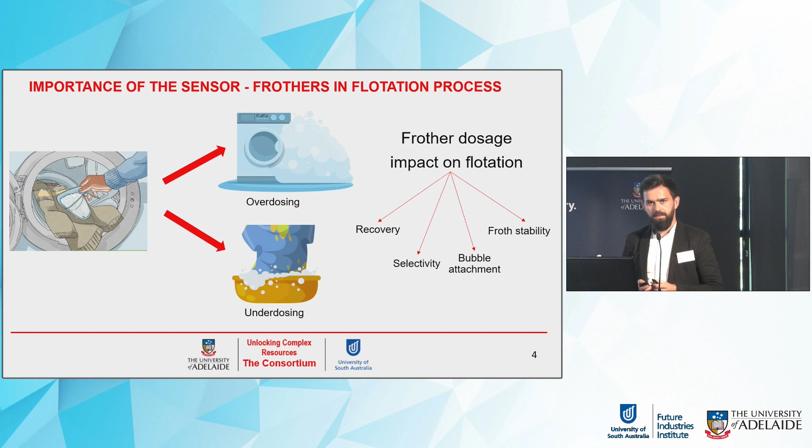The same thing happens in flotation, because overdosing or underdosing of frother may cause several issues impacting either recovery or grade, due to, for example, too stable froths or decreased probability of bubble attachment to the valuable particles. So how can we measure the frother concentration? For that, we can use interfacial tension, because frother adsorption at the interface results in interfacial tension reduction. As frother concentration increases, the interfacial tension decreases.

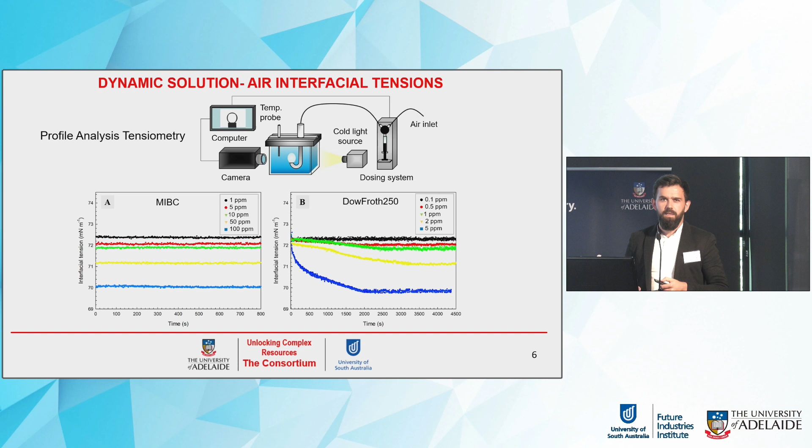For our investigations, we selected two frothers which are commonly used, MIBC and DowFroth. The first step was to get interfacial tension values for our frothers, and describe the adsorption properties by profile analysis tensiometry. For MIBC, it's characterized by instantaneous adsorption, as there is no interfacial tension drop over time, while DowFroth is characterized by slower adsorption kinetics, showing a gradual decrease in interfacial tension. However, the surface activity of DowFroth is much higher, because lower concentrations were required to achieve a similar interfacial tension drop. So we can clearly see we are dealing with two frothers having completely different interfacial behavior.

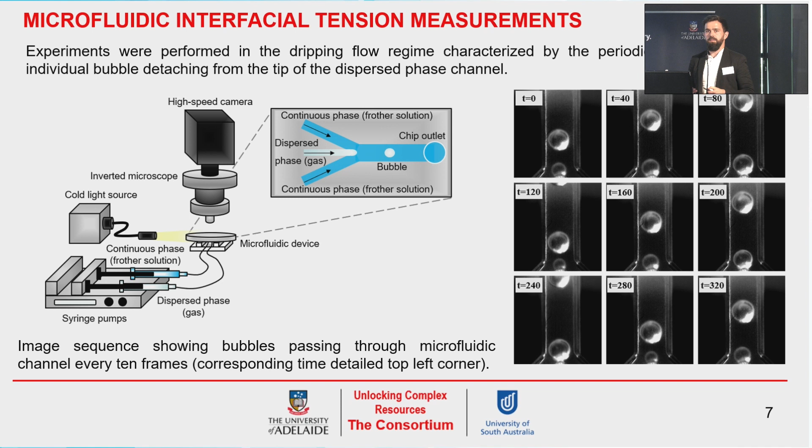So then we were focused on the development of this sensor for real-time detection. One of the technology platforms that has potential for deployment in industry to allow this dynamic inline measurement of surfactant concentration is microfluidics. So we fabricated a glass microfluidic device with coaxial geometry, which means basically that dispersed and continuous phase flow in the same direction.

Here is our design of the microfluidic chip, where we have a dispersed phase channel in the center where there is an air pump, and we have two side channels that meet this one channel where we introduce our continuous phase, which is actually the frother solution. These channels merge together to form one main channel where we observe our bubbles.

Within this geometry, the size of the bubble is only affected by the continuous phase flow rate and the interfacial tension. Why is this important? Because our analysis system was based on high-speed camera observations of how many bubbles were passing through the channel over a certain time period. The bubble formation frequency is directly dependent on the size of the generated bubbles. Okay, having this knowledge...

Let's have a look at the frothers' effect on the bubbles inside of the microfluidic channels. The presence of the frothers in the continuous phase results in the adsorption of the frothers at the interface, which decreases the interfacial tension forces that keep the bubble on the tip of the dispersed phase channel. As a result, smaller bubbles detaching at higher frequency were present in the microfluidic channels.